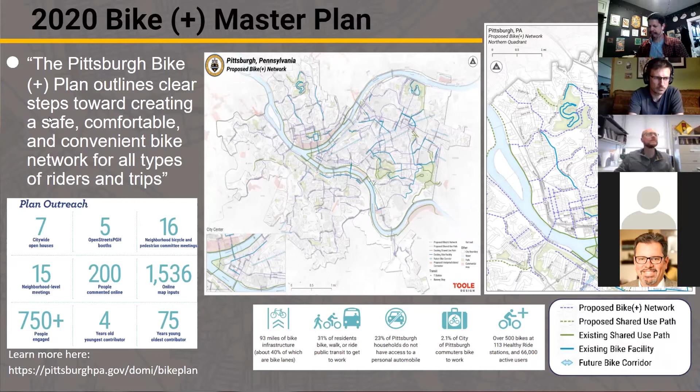The Bike Plus plan focuses on the goal of increasing high quality bicycle connectivity to key destinations such as grocery stores, transit stops, schools, or civic centers. Next slide, please.

MoveForward PGH is a partnership. The Department of Mobility and Infrastructure is leading the project, but cannot do this without our valuable partners, Bike PGH and Healthy Ride. We work together to engage communities throughout the MoveForward PGH campaign to install new bike-friendly connections throughout the city. For Northside in 2021, we have planned a total of 8 miles of bike infrastructure, and we're going to present some of the designs today from there.

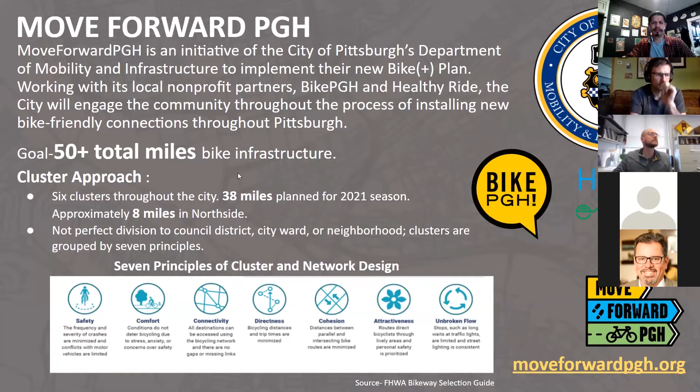Here are some examples of the MoveForward project, the type of project we are conducting across the city. Top left, that's from the Southside Neighborway, where we installed speed humps and sharrows for better visibility of cyclists and traffic. Top right, we have bicycle-specific wayfinding on the Southside Neighborway. Bottom right is a two-way bike lane upgrade we are currently working on at Negley Run Boulevard. Bottom left is the Gap to the Point Bike Lane Connector, which is a nationally recognized project.

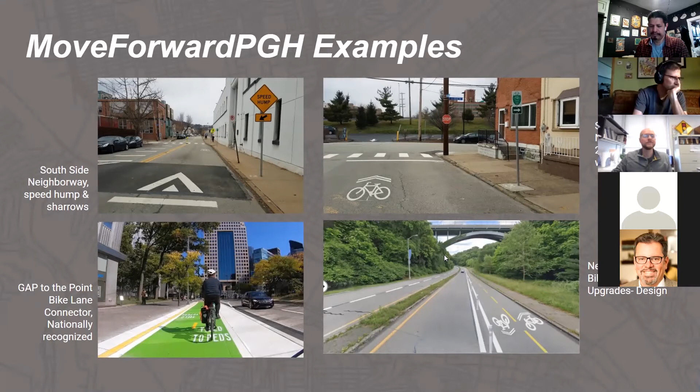In the very beginning of the process, we want to set the expectation level of public outreach for our projects. That's why we followed the Department of City Planning's engagement guideline. Since most of the Northside projects are based on reallocation of available space without major disruption to traffic, we took the consult level of public outreach for most of this project.

We also went through a two-stage corridor prioritization process to identify the potential locations the community wants, and today we will present them in the third phase, named design solicitation. After that, we will start collecting public comments again on these potential designs. Please note that to ensure community involvement, we made our engagement strategy a continuous process. So if you are present today, get the survey tomorrow, or attended our past public engagement efforts for Northside Phase 2, you are an active participant in all these projects.

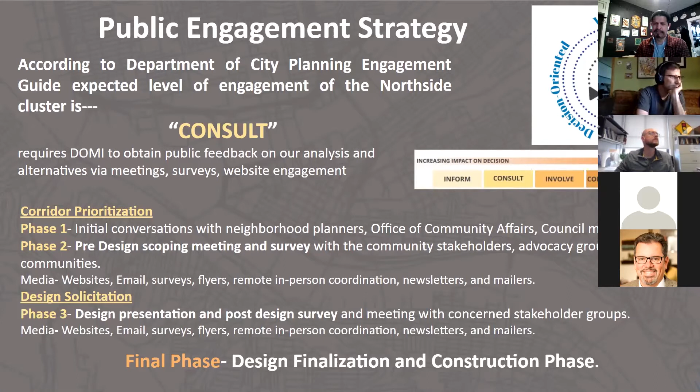A little bit about the pre-design survey process. For the pre-design survey and corridor prioritization process, we first presented rough potential corridors on February 2nd at the Northside Leadership Conference's Bike Ped Committee monthly meeting. After that, we reached out to around 20 Northside advocacy organizations like Perry Hilltop Fineview Citizen Council, Manchester Citizen Corporation, Brighton Heights Citizen Federation, Friends of Riverview Park, Allegheny West Civic Council, and Perry Hilltop Citizen Councils. We also reached out to 8 Northside faith-based institutions, distributed over 8,000 postcards door to door, and put up over 100 posters all over the Northside. We also used various social networking platforms to reach more people in the Northside and project-specific stakeholders.

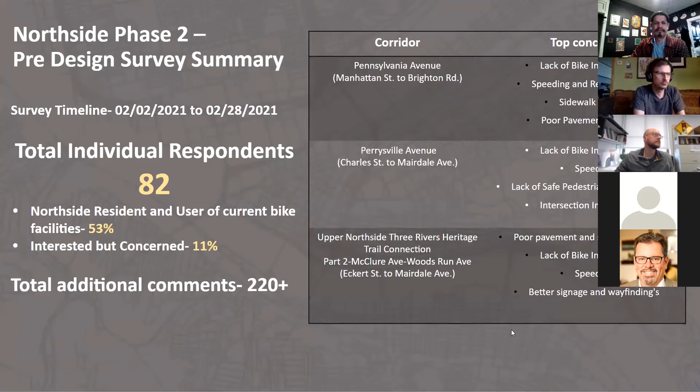A little bit on the pre-design public engagement findings. We went through a 26-day pre-design outreach process to identify top concerns on our design corridors: Pennsylvania Avenue, Perrysville Avenue, and McClure Woods Run, which we'll talk about today. We got around 220 comments from 82 respondents, and the top concerns are shown in the table. You'll see how we incorporated these issues into the design we'll present shortly.

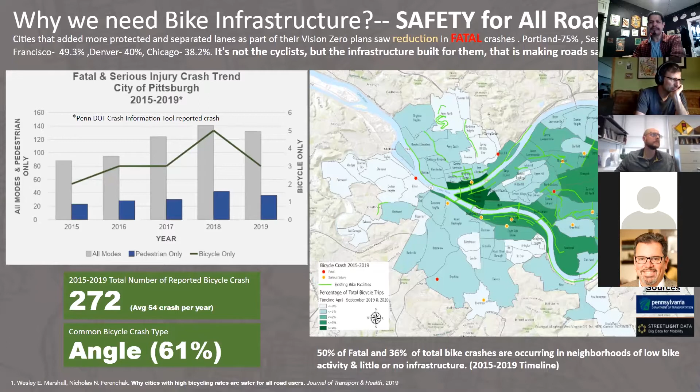Through this MoveForward PGH effort, we are not only ensuring safety for bicyclists, but actually ensuring safety for all road users. Different big and mid-sized cities across the country have already taken this path and found success. Our city is seeing an increasing trend of injury and fatal crashes across all modes of transportation. So if we want to make our roads safer for everyone, the time to act is now, and MoveForward PGH is one of the many ways the city is working towards it.

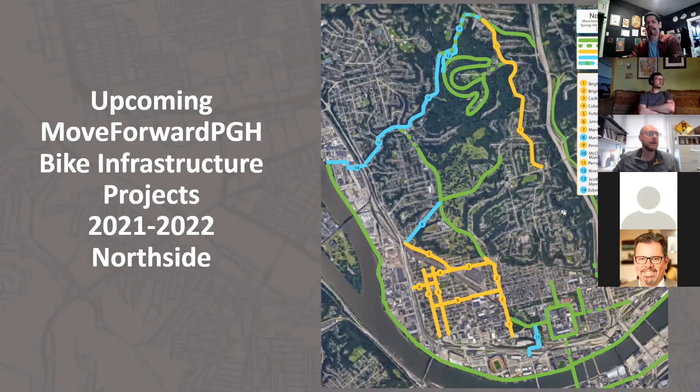The first project we're going to talk about is Pennsylvania Avenue. This project is going to start at the western end at Manhattan Street and travel all the way to Brighton Road. Again, this is the east-west connection through the lower to mid-Manchester neighborhood area to get over to Brighton Road.

For folks that understand this area and live there, you can appreciate that Allegheny Avenue splits Pennsylvania Avenue into two pretty distinct types of street. To the west, on the left of the screen, very residential houses on both sides of the street, high parking demand, lower traffic volumes and lower traffic speeds. To the east of Allegheny Avenue, as we Northsiders understand, Pennsylvania has extremely wide streets, very little traffic demand, very little parking demand, and it's quite a bit different than the residential portion.

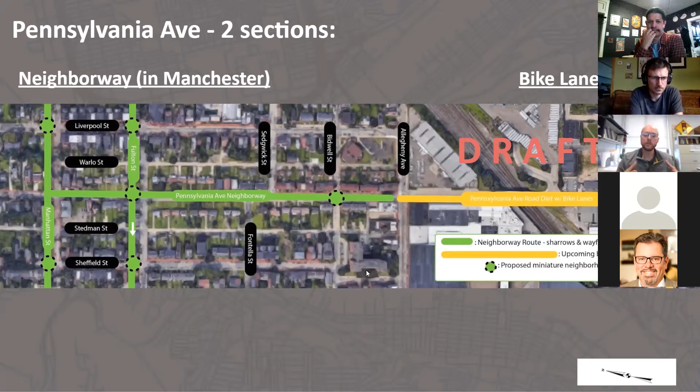So for the residential portion, we are proposing to handle this part as a neighborway. If you were at our last MoveForward meeting, we introduced several other Manchester neighborways. Again, these are generally shared streets in terms of cyclists riding in the same lane as cars and motor vehicles. We aren't proposing to remove any parking on this stretch, or travel lanes, but we'll use some traffic calming elements to make it a more comfortable street for all modes who ride it.

Ricardo, go ahead and give me one more slide. Some of the features we're including in our neighborways include improved wayfinding signage, more pedestrian-scale signage that helps someone orient themselves as a walker and a biker. Some updated pavement markings, so shared lane markings, those are sharrows if folks are familiar with bike terms. These also include pavement markings that help encourage drivers to slow down, and some intersection pavement markings at crosswalks that improve conditions for walkers. So just low-cost things, without removing parking or lanes, that help give it a more comfortable neighborhood feel.

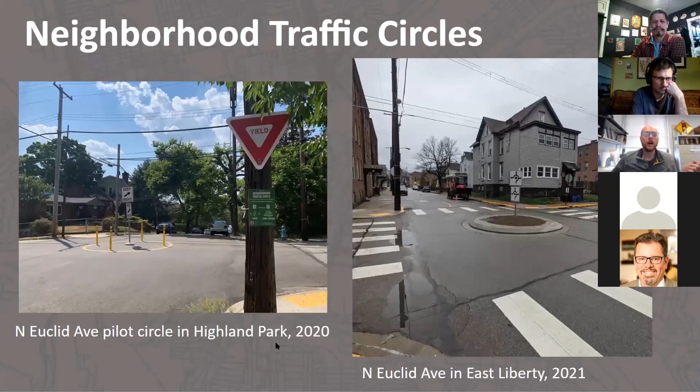And finally, some more intensive interventions such as speed humps that have a larger and more appreciable effect at slowing traffic down. One of those features, next slide Ricardo, are what we've successfully installed on 3 neighborways in the East End neighborhoods: traffic circles. These are relatively new to Pittsburgh.

We piloted the first ones, meaning we put out some test cases on North Euclid Avenue last year. We've learned some lessons from those and adjusted our designs to make them more appropriate for all users of streets. Now we've got those into the ground in permanent concrete, with landscaping to come once the weather improves.

On 2 of those routes, with the 3rd on the way in May. So these are neighborhood, slow street type of a scale that still allows all vehicles to traverse in and around them while not allowing them to blow through the intersection.

So the goal here is, yes, to help bikers, but this is really for all people that use these streets and experience some speed issues and intersection issues by drivers, maybe not quite following stop signs and not quite following speed limits. This is really a traffic calming feature that we expect to help all modes on the street, not just bikes.

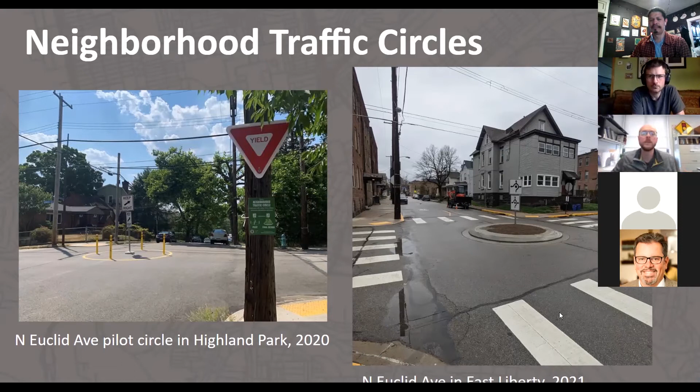The other portion, the eastern portion of Pennsylvania Avenue, is proposed to have what we term as a road diet. That simply means taking the existing number of lanes and using some of that space for other means. We're proposing 1 driving lane in each direction. The volume of vehicles on the street does not support the need for 4 lanes here, so drivers will have plenty of capacity on just 1 lane in each direction.

And there's no parking demand on the north side of the street, so that allows us to find space to add a dedicated bike lane in each direction with a small buffer that separates the cyclist from the driver. The goal is to reduce the amount of space the driver has without taking away too much from a needs perspective, hopefully reducing the speed of drivers while providing plenty of dedicated space for the cyclist with what's left.

We will maintain all legal parking on the south side of the street, so the side with businesses will have all the existing parking they have today. The reason we were able to fit those bike lanes is by removing parking, really taking the curb lane on the north side of the street and reallocating that space to bike lanes.

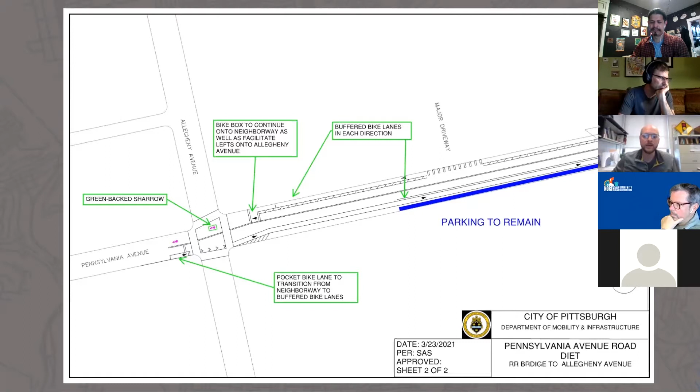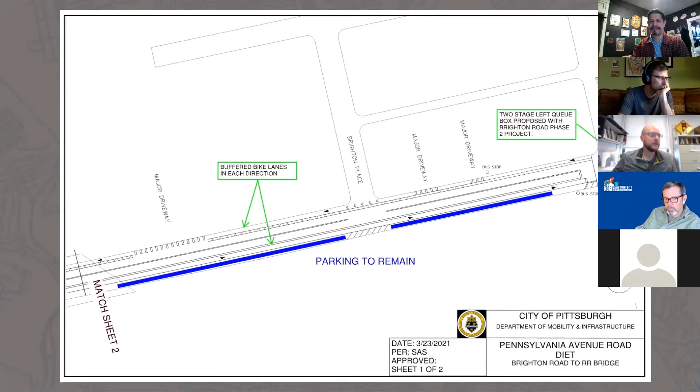Here's just the second half of that—same situation as the first part, a bike lane in each direction, no parking on the north side, but all parking remains on the south side of the street. And with that, Ricardo, I think we can move into our next project.

So this one we're going to talk about now is the McClure Woods Run Corridor. This is another one of the common, ongoing north side needs. This is needed to connect down to the riverfront trails by the old penitentiary, and then all the way up to Riverview Park towards the Mairdale entrance.

Folks familiar with the area will note that it cuts off the Eckert Preble portion in and around the Alcosan plant. That would certainly be part of the full corridor and full connection to the trail once it got developed. Those streets are really more likely to be signage-only types of projects to help orient the rider, and there's a number of significant pavement issues on them as well. So we wanted to cut it at McClure for purposes of this planning and design.

So we will present here some options for that. Go ahead, Ricardo.

Here's a little bit of data that we've collected. When we do all of these projects, we go out and collect as much data as we can. For complete streets type projects like this, two extremely key factors are vehicle volume and vehicle speed — the number of cars on a street, and the speed that they're going.

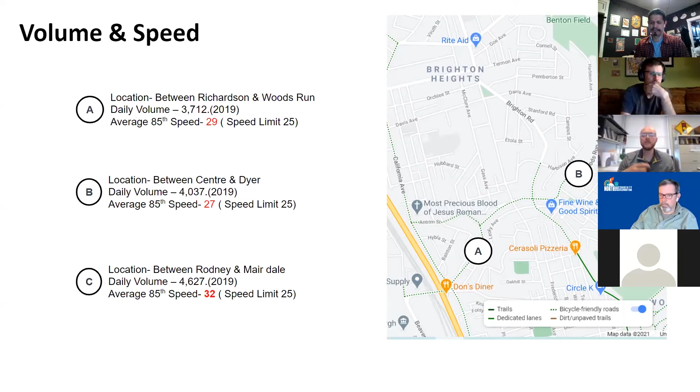Why that matters is because even though our speeds for the first two sections, A and B, are relatively reasonable — and we certainly don't encourage anybody to speed — considering what we see in many other parts of the neighborhood and across the city, these are relatively calm. But the number of vehicles means there's a lot competing with a cyclist using the same lane. That's where we look to put in traffic calming features that reduce speeds to make it more comfortable and safe for all people on the street.

Go ahead, Ricardo. Here is also the safety data and safety analysis that we pulled. I'll give everybody a little bit of an opportunity to review this without necessarily going over it piece by piece.

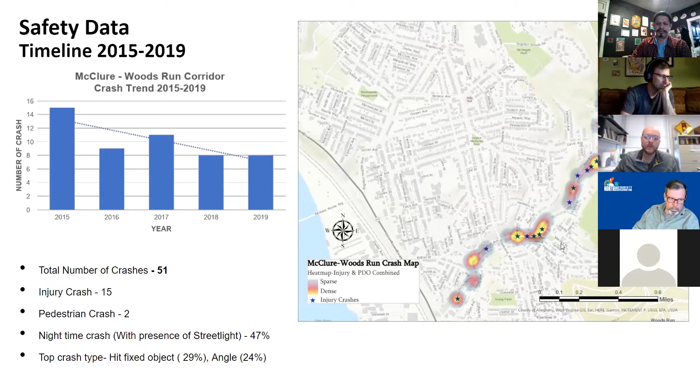If you look at the map on the right-hand side, you can read this as: the yellower a dot is, the higher the number of crashes or the higher density of crashes in an area. One thing we note here, when we match this up to our volume and speed data, it matches almost perfectly as you go along the route. The higher the number of vehicles and the faster they go in an area, the greater number of crashes we see.

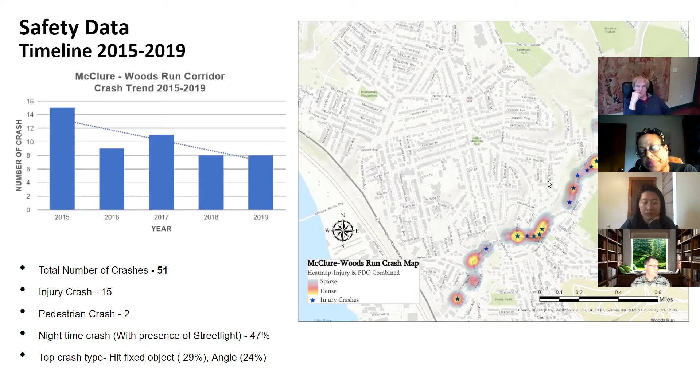So this helps us orient ourselves and identify certain types of traffic calming features where they're needed most. One thing you'll note here, and it comes as no surprise, a lot of the curves and bends in the road are high crash frequency areas. Go ahead, Ricardo.

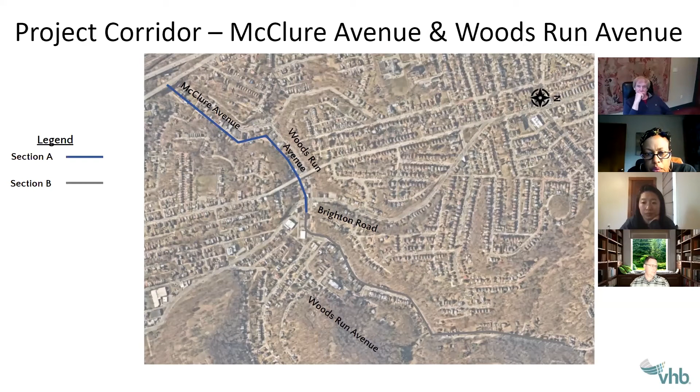Okay, so we got into planning out this corridor. We really decided to split it into two pieces based on existing conditions and potential solutions to improve them. Those two sections are from McClure up to Brighton, and then from Brighton up to the Mairdale entrance near the park. Go ahead, Ricardo.

For what we're calling section A, the beginning piece, that will more or less take you from the Chateau area, down towards Alcosan, up to Brighton Road in the existing conditions. So what's out there right now is 30 feet curb to curb, with parking on both sides. If you look at the typical section below, that describes how the street works.

8-foot driving lanes are too narrow — narrower than we would ever design a lane. So having parking on both sides of the street more or less requires drivers to share whatever remaining space is in the middle.

This is why you see a lot of parking on sidewalks. When we allow parking on both sides on narrow streets like this, drivers unfortunately oftentimes ignore those cues and still drive fast, clipping mirrors and doing things that make the people parking cars want to move further out of the way. So this is what our existing section is.

We are not proposing right now to remove any parking on the street, but we are going to walk through a couple options that we can present that look at what we could do if we did remove one side of parking.

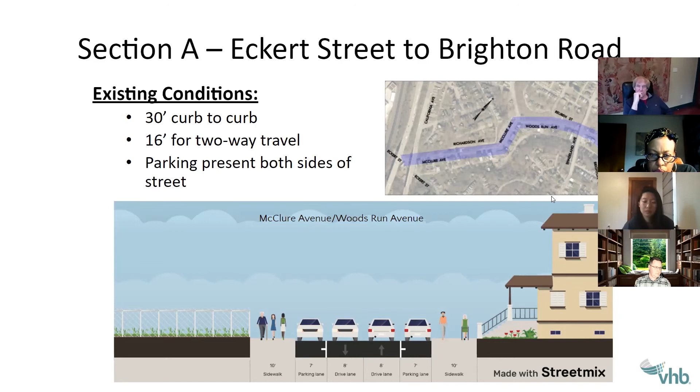As a potential condition for this first section, the north side of the street has far fewer homes and businesses on it than the south side. Because of that, when we did our parking surveys, we saw a significantly lower number, almost no parking utilization on that northern side of the street. So if we were to remove parking on one side in order to provide additional space for other modes on the street, that would be the direction we would be looking to take out.

What we can do with that space in this option, we proposed a single bike lane going in the Riverview Park direction. Folks familiar with riding this route will know that generally, from the trail up to Riverview, it's an increasing grade. It's really steep only towards the park, but even through here there's just enough of a casual grade that it slows you down a little bit.

The slower a cyclist is riding, the more conflict that's going to create with vehicles. Conflicts create safety problems. So in this case, we would propose to put a bike lane in that uphill direction, towards the park, and a shared lane with vehicles in the opposite direction. You'll note here, though, that we still only have about 9-foot travel lanes here, so this is still a pretty tight section -- one of the reasons we are not outright proposing to remove parking in this location.

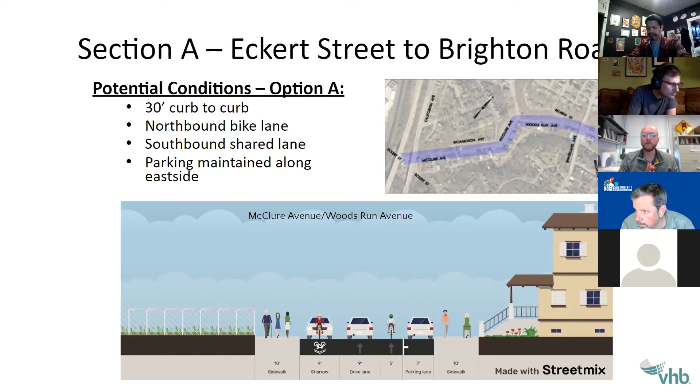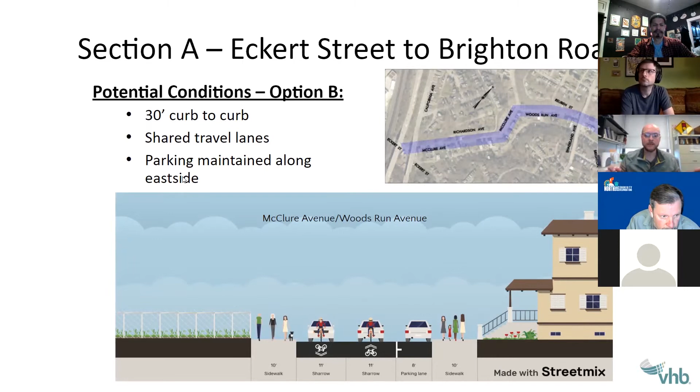Another potential option here is again to remove the parking lane along the north side of the street. But instead of keeping the two driving lanes narrow and adding a bike lane, we just widen them out to a more appropriate width and make them a shared lane condition in each direction.

This effectively is what you ride out there today, since there is so little parking along that north side of the street. Vehicles most often just use whatever space is remaining between that curb and the parked cars on the south side as the two lanes of driving, and cyclists sort of share that space in each direction with them.

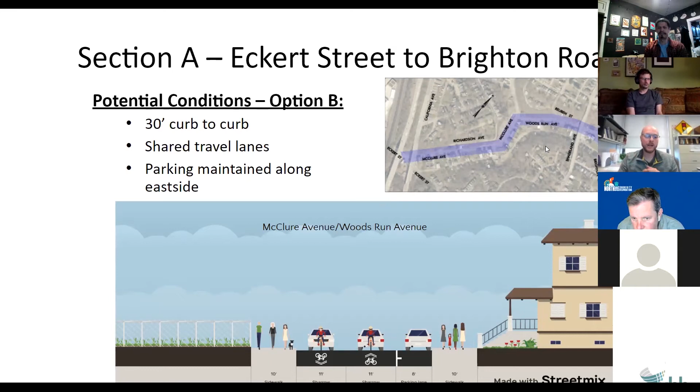Lastly, with our Option C, this is more of what we would term a traffic calming specific option. This would use the same exact existing typical section -- 30 feet, parking lanes on both sides with shared space in the middle for the two driving lanes.

These would also be shared routes, so cyclists would ride in lane with the drivers in each direction -- functioning very similarly to how it does now, exactly as it does now.

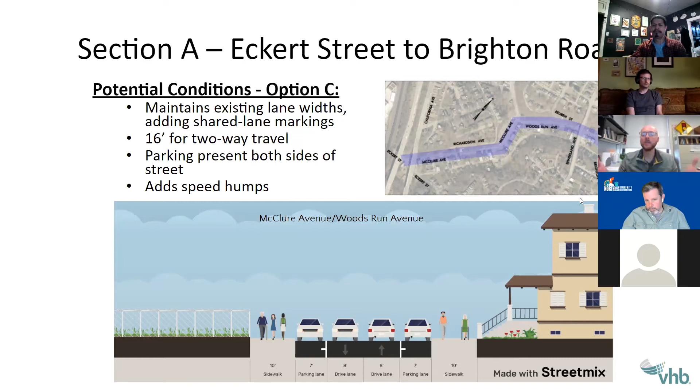The point here would be to keep all the existing parking, keep all the existing driving, but better control the speed of drivers through the section that is being shared with cyclists.

As part of this, we would also be looking to do the same types of signing and pavement marking upgrades -- better wayfinding, shared lane markings, maybe curb bump outs and high visibility crosswalks at intersections to help pedestrians. Really, any kind of low cost, low impact things that we could do to make it a safer, more comfortable route.

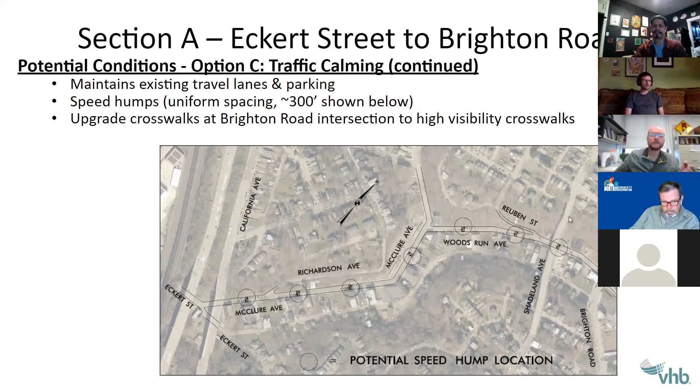So the next section from Brighton Road, this is really going to be for Brighton Road all the way up to Mairdale, up to the park. But we are breaking this out a little bit as well. The first section here up to Rodney Street, we appreciate has a fair amount of parking demand, and parking is present on both sides of the street. So our proposal is not proposing to remove any of that parking.

However, if the community would come together and decide that in that first section, there is enough parking on the south side of the street to handle all the parking on the north side as well, and would like to have the bike lane option there, we could look at connecting and extending that past Brighton Road through this section. So that's not a proposal from DOMI right now, but this is something we want to make sure the community understands is certainly a possibility if there is a need and interest for additional bike infrastructure.

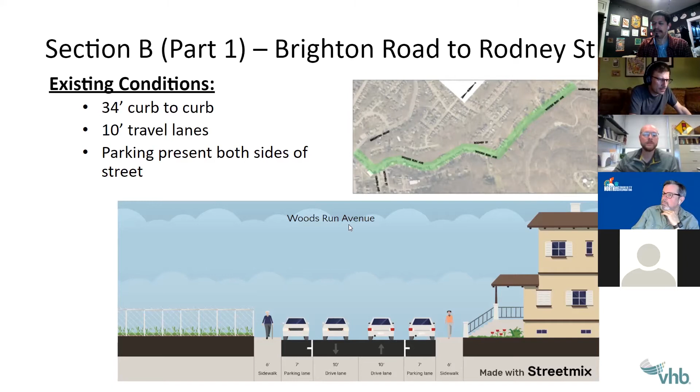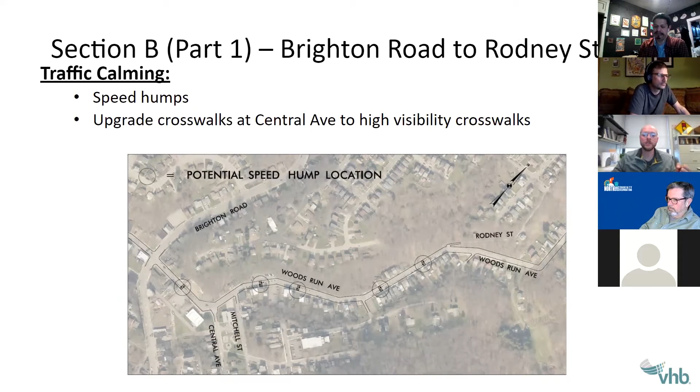Next slide, Ricardo. As is now, though, we are similar to the last option on the first section. We would propose mostly traffic calming type upgrades through this stretch, keeping the same parking and the same driving lanes, and simply adding speed humps or other types of traffic calming features that would work to control speeds, lowering them back down to at or below the posted speed limit, while upgrading intersections and curves and other features that could use better pavement markings.

Go ahead, Ricardo. One of the high crash location areas along this corridor that we would look to do some traffic calming and safety improvements is the intersection with Central Avenue.

Folks that are familiar with the neighborhood will know this is kind of a wonky intersection there. We would look to use just simple materials, sign pavement markings, to better delineate the path of travel for vehicles as you come through this intersection. This wouldn't remove parking in any appreciable sense, but simply better orient folks as they travel through and provide better operation for not only vehicles, but cyclists and pedestrians as they're traveling through here as well.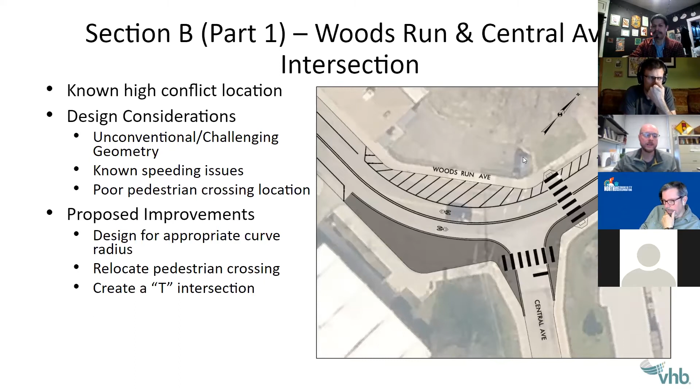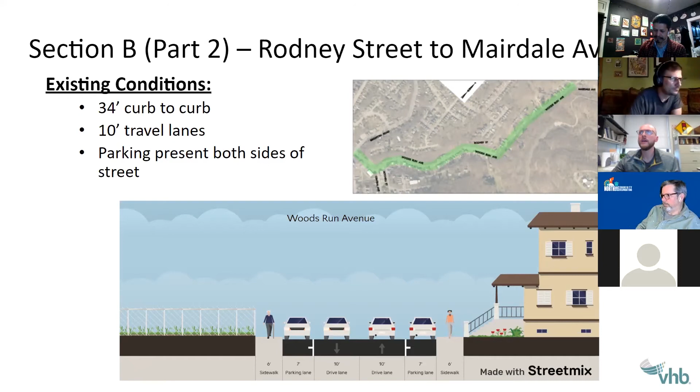Here, we would look to simply add a bike lane in that uphill direction. So on the side of the street with very little parking, if any, right now, that would be converted into a bike lane. This is also the steepest part of that ride up to the park, so this would help get cyclists out of that lane of driving, making it a little less conflicting for both the cyclist and the driver. Then in the downhill direction, we would have a shared lane with drivers so that parking could be maintained all along that side of the street where the parking demand does exist right now.

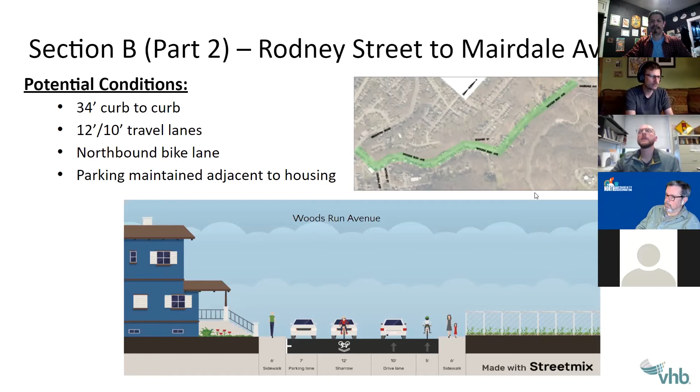Ricardo, go ahead. And with that, that'll get us to our last project. This is our last project to discuss on this call before we get to questions. It's also our longest and most complicated. Perrysville Avenue is a street that has been identified as a key part of the Northside Network by both our Bike Plus plan and also from years of coordination and complaints we hear from Northside residents. We also appreciate that this is a very diverse corridor with a lot of different needs as you go from one end to the next.

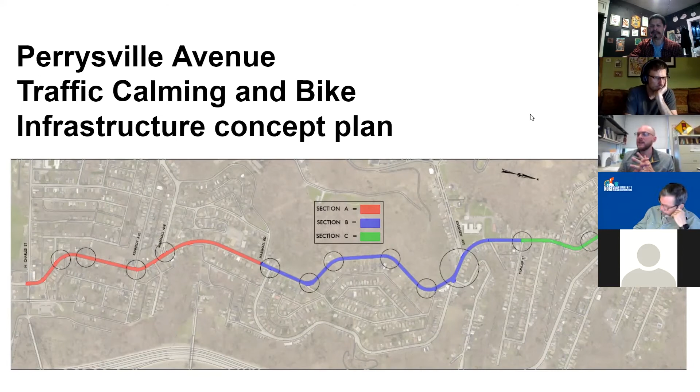The other thing I'll note here is that the city of Pittsburgh, us giving this presentation now, we only own from North Charles up to Marshall Avenue. From Marshall up to Mairdale is owned and maintained by PennDOT. PennDOT has fairly significantly different types of things that they'll allow done to a street in terms of what we would call traffic calming features or vertical elements. So what we're able to do on this section is fairly well controlled by what our partners at PennDOT will approve here. So we can get right into the sections.

First, to review some of the data collection for this corridor.

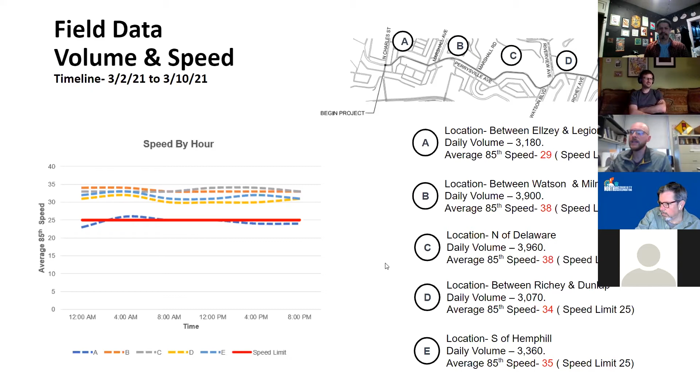First and foremost, the volume and speed of vehicles. This section on the left looks at speed across the day. I'll remind everybody that this is a 25-mile-an-hour posted speed limit on the street. So you can see that from the beginning to the end is considerably above what our posted speed limit is here. We are using this data to look at where our speeding issues are the greatest and where there is the greatest need for some sort of traffic calming intervention. You can see as you read through the area that is under DOMI control, under city control, in section A, also happens to be the slowest section, with speeds increasing greatly as we move along the route.

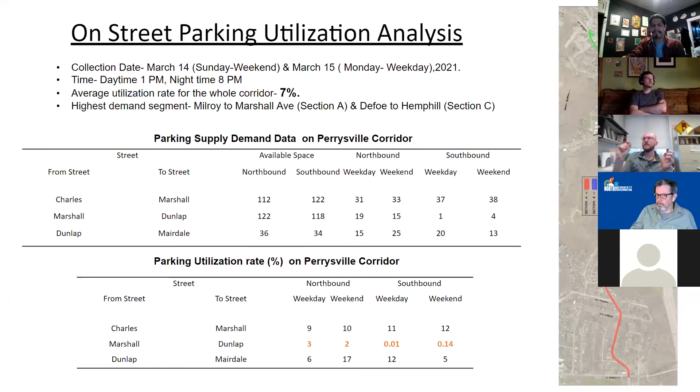The take home here is really just verifying what we kind of understood as a department and how our neighbors use the street in general. The southern section and the northern section have higher parking demand, while that middle section has very, very little parking.

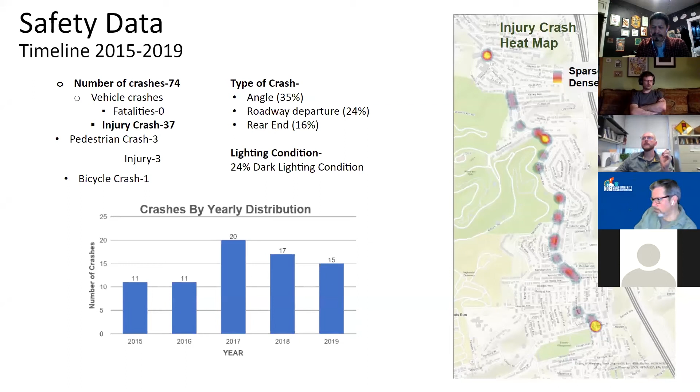So what we're going to do here, we have had our consultant put together a conceptual plan for all 3 sections of Perrysville Avenue. We are going to walk through some of the highlights of those sections and give folks a little bit of a preview of an understanding of what types of treatments and plans we would be proposing in this area.

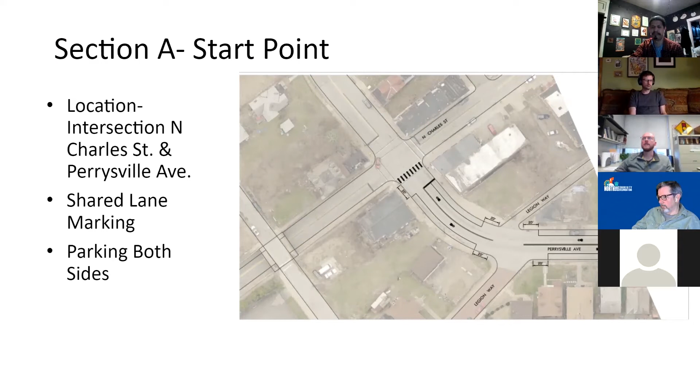Starting down at Charles Street, the southern end - this is our section A where we are not proposing to remove any parking or change the vehicular operation of the street. So here we will be looking to do some shared lane pavement markings, some high visibility crosswalks in order to improve comfort of the street.

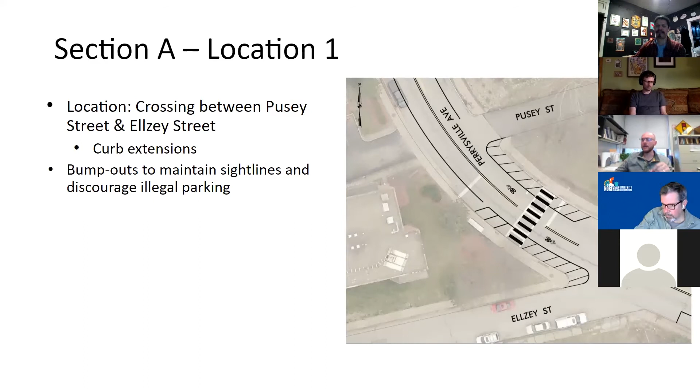Moving further northward, we have our first bus stop crossing. This is next to, I believe, a senior housing center on the left-hand side of the street if you're going northward. Here we're looking to increase the visibility and safety of this crosswalk with some high visibility crosswalks, shared lane markings, and also some painted bump outs that discourage parking where none should be occurring due to the proximity to the crosswalk and intersection. So again, this isn't taking away any legal parking, but will hopefully help control speed of vehicles a little bit and improve the visibility of walkers trying to cross from one side or the other.

Our next location occurs just a little bit northward on the street at our next bus stop. This is in a tangent section, a straight section that leads into that last big curve. We would look to control speeds here with a splitter island. All this does is improve the crosswalk with high visibility markings, and forces drivers to move away from the center line a little bit as they approach. That gets their attention, forces them to slow down a little bit to negotiate the jog in the lane, and also provides a buffer in the middle for a pedestrian should they encounter a driver not yielding to them in the crosswalk.

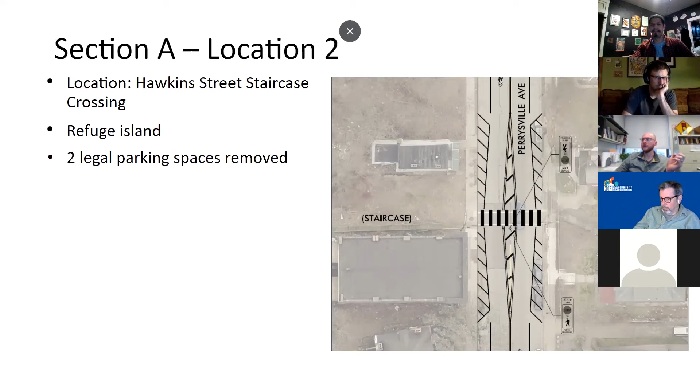Location 3, just further northward at the next intersection, similar to the first proposal. This is going to be marking out painted bump outs at locations where parking is not legal right now, helping improve visibility of the crosswalk, while putting in high visibility crosswalk markings to once again increase comfort for walkers and hopefully slow driving speeds down some.

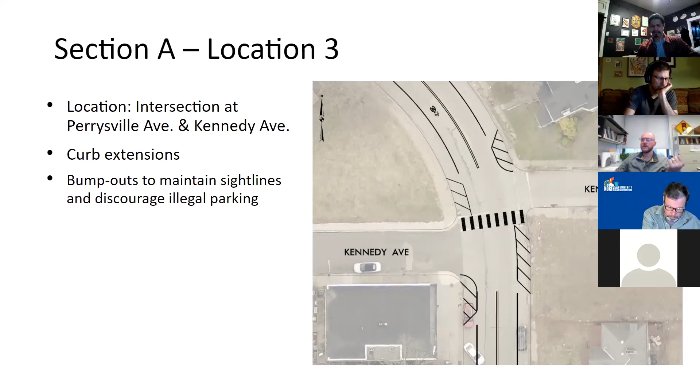Next location is the intersection of Marshall Avenue. This is very similar to the previous locations in that we are just adding bump outs to increase sight distance and visibility, while also narrowing the field of vision for the driver in order to slow speeds down. Also here we're upgrading to high visibility crosswalks.

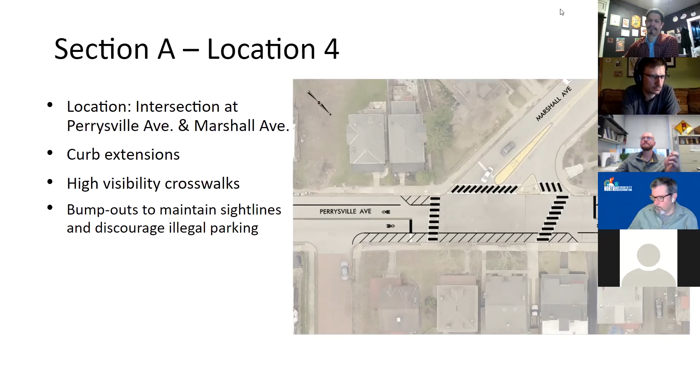This is now out of the section that is city owned, and right on the edge of Section B at Marshall Road, where we see our parking utilization drop significantly and the ability to open up some space within the street for potential bike lanes. So how we are proposing to achieve full dedicated bike lanes in this section is to remove the parking along the park side of the street. We saw very, very little utilization, almost zero, along the park side, and very little along the neighborhood side as well.

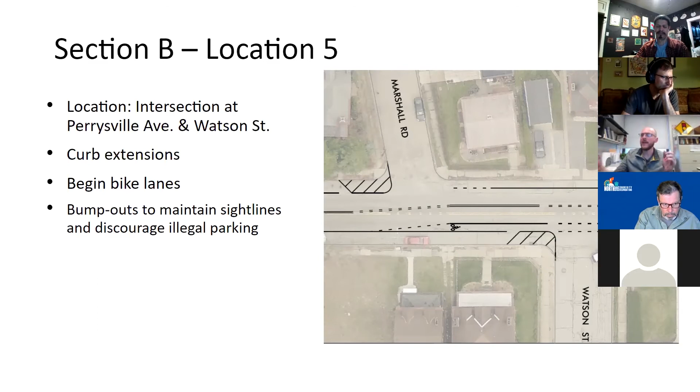This is a section that is mostly very steep up to homes on the right-hand side of the street as you're going northward. We understand most folks park off-street through that section. However, instead of removing all parking, we are able to get the dedicated lanes in by just removing parking along the park side, where none is really occurring right now, and in that way get a dedicated bike lane in both directions.

Coming up to Delaware Street, this is the first big curve along Section B. This is the section where we're also seeing speeds escalate significantly above the posted speed limit in the neighborhood of 35 miles an hour, a 10-mile-an-hour increase.

We're looking to do some additional types of traffic calming elements through here. Two of those: one, speed minder type signs. Generally as a department, we look to encourage better driving behavior through what we term self-enforcing design—certain design features that really force or encourage a driver to slow down without having to be told to do so. These are features like speed humps and pavement markings that help assist slowing vehicles down. We have also included speed minder type signs in a few locations across the city and would be amenable to including those in a few key areas on this section of Perrysville.

Also, what we have shown here are what we have started using on some of our traffic calming projects—transverse pavement markings. On the right hand view, you see the pavement markings that cross the full lane. Those are what we call transverse pavement markings. The next slide will show a little bit more detail about what those look like.

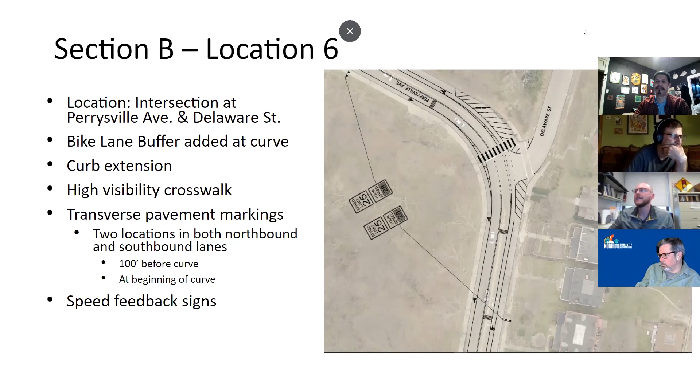This is a pavement marking, basically a 6-inch marking on top of an 8-inch marking—or rather a 4-inch marking on top of a 6-inch marking. What that does is create a very, very slight raised portion above the pavement. As the vehicle goes over that section, you can feel that vibration as a driver, but it doesn't have the very deep grooves that create excessive noise like a rumble strip. So we don't like those.

These are very different from a rumble strip, but effectively give the same cue to the driver, inducing them to take more notice of their behavior and speed, and hopefully encouraging them to slow down a little bit. So we're looking to propose these before each curve along this section.

We put two of them 100 feet apart, one 100 feet before the curve and one right at the curve. We've already used this once in the city on Maytide Street in the Carrick neighborhood, in the South Hills of Pittsburgh. Maytide Street was a traffic calming project we did last year. We saw excessive speeding there, with top speeds over 100 miles an hour, and unfortunately that's not the only street where we measured speeds that high.

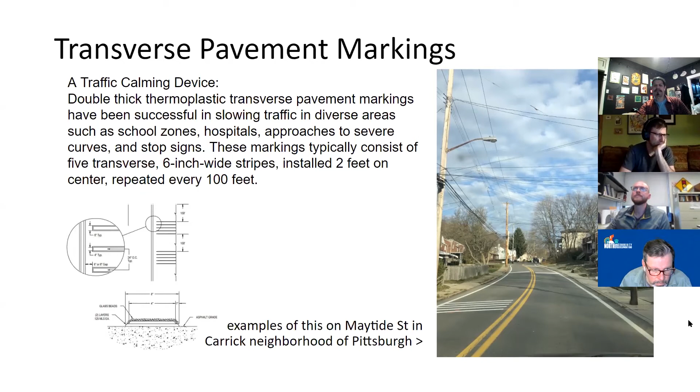Getting into the curve sections, you'll note that on two of the curves where we're experiencing high crashes, we're looking to also take the parking on the north side of the street, so that we can add a buffer into this section.

Again, this is primarily due to the increased number of crashes we see here, along with the low utilization of parking and the ability of people to park off-street. So what we would do here is simply add in one of those striped buffers we talked about on the Pennsylvania Avenue project, to give some additional space between the bike lane and the driving lane, while reducing the amount of space the driver sees as they're driving, in hopes of inducing them to slow down as they go through this area.

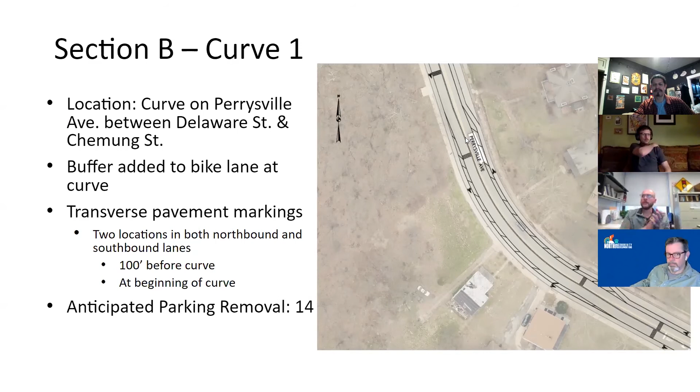You'll see the transverse pavement markings here, and then the bike buffers and the lane narrowing, in order to hopefully effectively calm traffic down to more appropriate speeds through here.

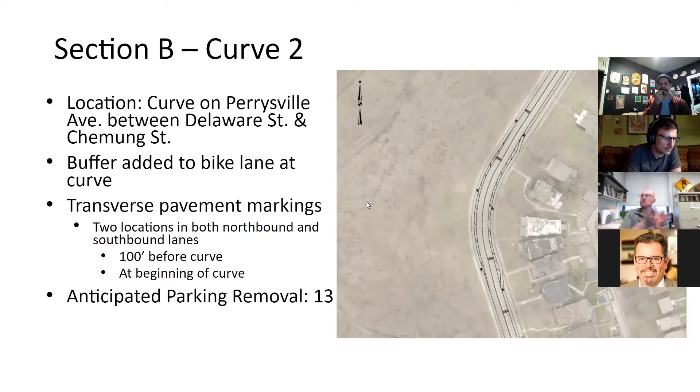That same thing applies to the next curve just north of that one. Again, low parking demand, high availability of off-street parking, and high numbers of crashes here is why we'd be proposing to do a little bit of that additional safety work to buffer the bike lane.

The last curve is heading up into our section C, which is back to a shared lane section. Speaking to the increase in parking as we go along the corridor, we will not be adding the buffer here, but we will be proposing to use the transverse pavement markings to slow down vehicles, and we'll also carry the dedicated bike lanes right to the edge of the screen here.

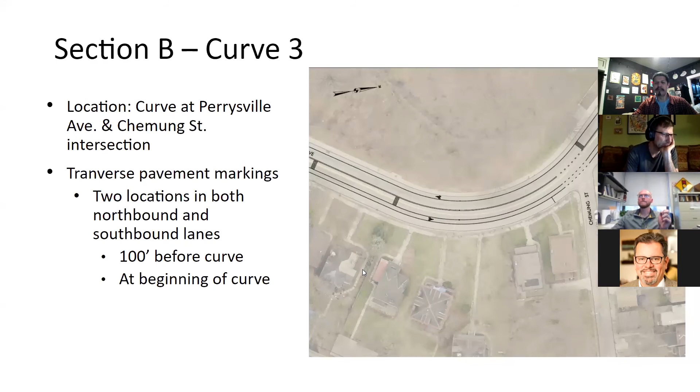That comes in right to the interface between sections B and C. So here is where we drop our bike lanes so we can come back to our shared lane section that maintains all existing parking and all existing travel lanes. Again, these are just some painted bump outs, some high visibility crosswalk markings, and some lane markings that will hopefully work to slow speeds and calm traffic through those areas.

Another location at Dunlap Street involves some daylighting of the corners and high visibility crosswalks.

As we approach the high school and the 5 Points intersection, the last real problem area we see from a crash cluster is right at this curve. We're predicting that, at least in the southbound direction, this is occurring a lot because drivers are picking up speed as they enter into that curve.

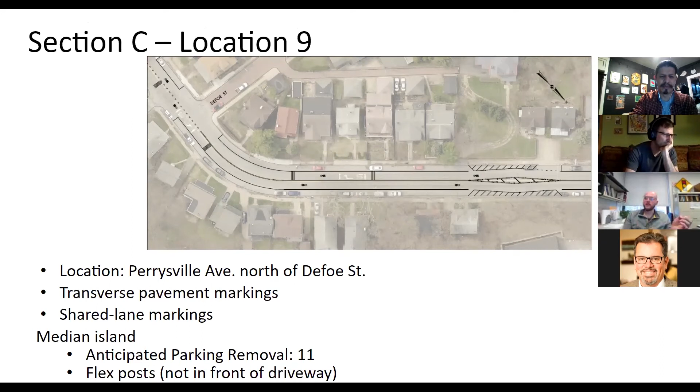One of our low cost, low impact traffic calming measures is what's called a splitter island. To the right of the screen, you'll see this is similar to the crossing improvement at the southern end of the project, but it simply works to force drivers to adjust their path and slow down, so we get to more appropriate speeds before reaching that curve.

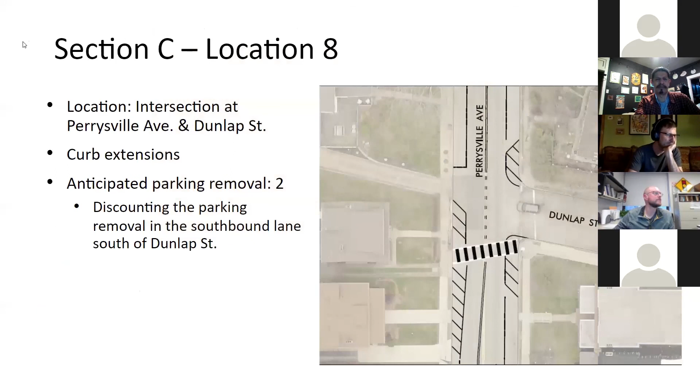Sorry, me again. Could you flip back to the drawing of the Venture Street intersection? I think it was number 7. I just wanted to see the crosswalks. This one? Oh, maybe it was. Yeah, okay, so yeah, you were there.

So the crosswalk there at Venture Street, would it be possible to move it south to the other side of Watson? Only because if you're trying to cross there, people are coming down the hill and around a curve to that stop sign, and they don't have as much time to see you. I don't know if there could be some crosswalk maneuvering there, because most people don't cross there anyway.

No, that's great, Liz. That's great feedback. I think we could definitely take that back to the consultant and have them change that. So right now it's a marked crosswalk on the north side, but you're saying most people cross on the more southern side, even though there isn't a crosswalk there. Is that correct? Yeah, because it flattens out a little bit there, and the cars coming around the curve have more time to see you.

Sure, and so it feels safer, I think. Okay, sure. If nothing else, Liz, we might be able to just add another curb ramp and connect them both, to be honest with you. We like to do that wherever it's feasible and doesn't create some other issues. So we can certainly take that back to the consultant as well.